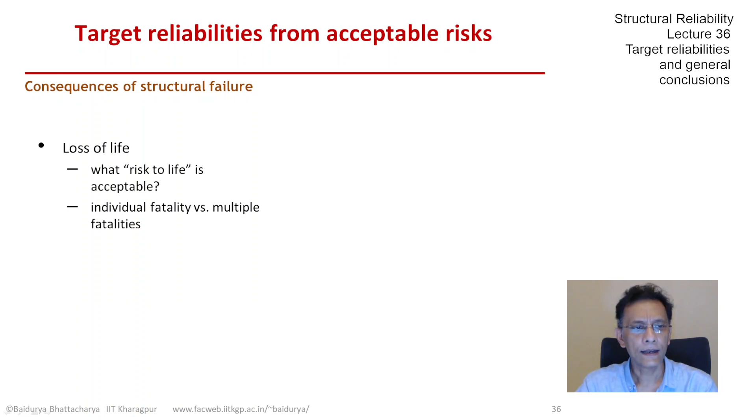Then there would also be the question of the context of death. Was there a choice on the part of the individuals? By which I mean, was the person a member of the public, or was the person a professional in charge of, say, maintaining the building, or a construction worker, and so on.

The other consequences obviously would be economic loss, and then what to include in that would be an important question, and obviously one uncomfortable question that has many implications, including moral and philosophical ones, is: is there a monetary value of human life, and if so, how to put that?

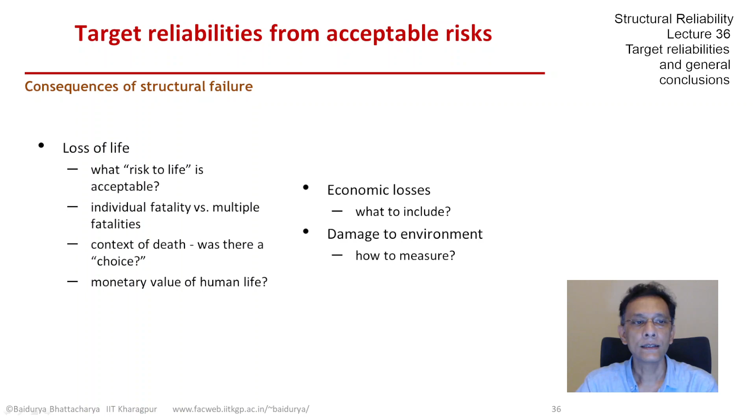And we also have been talking about environmental damage, and if we include that as a consequence, how to measure that. And this is all in the context of acceptable risk that we have been discussing in the hope of setting target reliabilities. So let's take a look at acceptable risks to life.

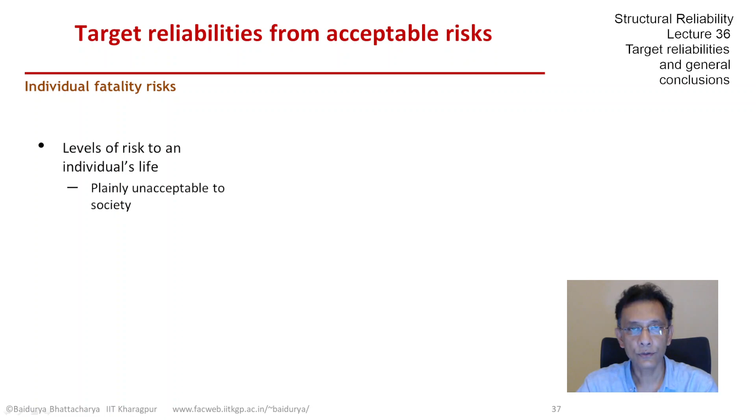Let's get some idea of individual fatality risks, some numbers, but before that, the levels of risk to an individual life from society's point of view could be at a level that is plainly unacceptable. It could be so high. There are other levels of risk to an individual's life which we may not be very happy about, but we grudgingly accept. It's kind of intermediate. We are ambivalent towards that.

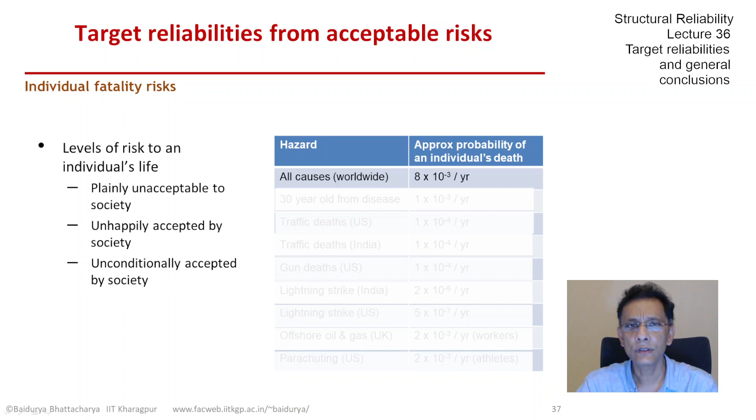And then there are, on the other end of the spectrum, those risks that are unconditionally accepted by society. We really don't worry about those. So let's take a look at some activities or some hazards and what are the approximate individual life risks. So a rough estimate of death of an individual from all possible causes worldwide is about 8 in 1,000 per year. So that's a pretty stable estimate across countries.

Now, if we look at death of a 30-year-old individual, otherwise healthy, from disease, that comes to about 10^-3 per year, which would, without a doubt, be plainly unacceptable to society. So if we have to put an acceptable risk, we would need to go well below this.

Then there are other activities which people undertake because of benefits that come from them, but the risks are definitely more than what we would like, an example being traffic-related deaths, about 1 in 10,000 per year, and that is what we see in the US, that's what we see in India, and we also see a very similar rate of gun deaths in the US. Now, obviously, these are not something that society is happy about. There are discussions about how to reduce these.

So this level of 10^-4 per year per individual would be something that is on the borderline, or something that is in the gray area between clearly unacceptable and clearly acceptable. Now, what would be unconditionally accepted by society? Something like death from lightning strike, and that is of the order of 2 in a million per year in India, and almost one order less in the US. So that's roughly about 5 × 10⁻⁷ per year.

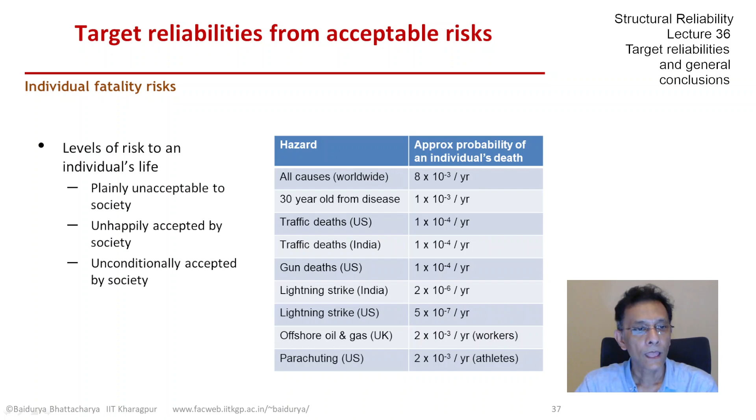These are undertaken in some sense voluntarily, so there is not so much outrage at this level of fatality in these last two mentioned activities compared to the death from disease that you see at the top. So these give an idea about the different ways that society reacts, and would also give an indication of what might be an engineering level of acceptable risk were we to set the target reliability for a structure.

As we saw and as we decided, that 10⁻³ per year for an individual is clearly unacceptable. And we can see something like this right now in the middle of a pandemic worldwide, and clearly the levels of fatality that we are seeing are not acceptable, and that's why so many restrictions are in place, and there is so much concern going on.

Now, the next level, 10⁻⁴ per year, is something people are concerned about. People are, if they can be encouraged, willing to take this up and reduce these risks. So this would be something that, as I said, is on the borderline of acceptability.

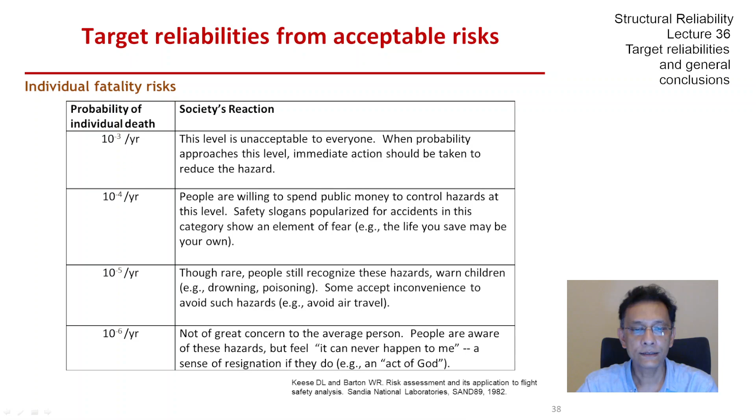And then lastly, this rate of 10⁻⁶ per year for an individual seems to be something people are willing to accept and not worry about, and sometimes referred to as an act of God, and it can never happen to me, that sort of feeling. So with all of these, we now see some criteria actually set by some authorities around the world.

So I have a survey of 3 countries, the HSE from the UK. So for a worker, the maximum acceptable risk is 10⁻³ per year for death. For the public, it is 10⁻⁴. So that's on the higher end of the spectrum that we're talking about. And negligible risk is 1 in a million. That seems to come again and again.

From the Netherlands, we see a different order of magnitude for existing situations which people are more comfortable with. It's 1 in 10⁵, and for new situations, the tolerable risk is of the order of 1 in a million. So that kind of ties in with the negligible risk from the UK.

In Australia, we see some of these numbers, and the acceptable rate for schools and hospitals is of the same order as a lightning strike in the US. So they want it to be as low as that. For residences, they're of the order of 10⁻⁶, so very low, which is considered negligible in the UK. And for industrial, sporting and commercial activities, they are another order of magnitude higher in terms of acceptable risk.

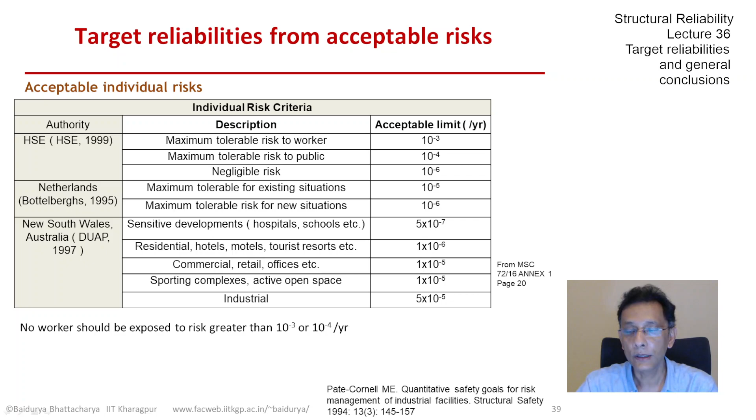We see something from Pate-Cornell, just to summarize the general trend from around the world. She came up with certain recommendations that the risk to a worker should not be greater than 10⁻³ or 10⁻⁴ per year. For a member of the public, those would be 2 orders of magnitude less, 10⁻⁵ to 10⁻⁶ per year.

And the de minimis that we have been talking about, that's something that is of no legal concern, of just no consequence really. That could be as low as 10⁻⁶ for a worker, and so that would be the ideal case. And for a member of the public, 10⁻⁷ or even 10⁻⁸ per year.

So with these, we can try to see how buildings come into the picture, building failures or structural failures, and how we could then look at multiple deaths. So these are all for one individual. Now, if there are multiple fatalities possible, how we would handle that is also a very relevant question for building or other structural failures.

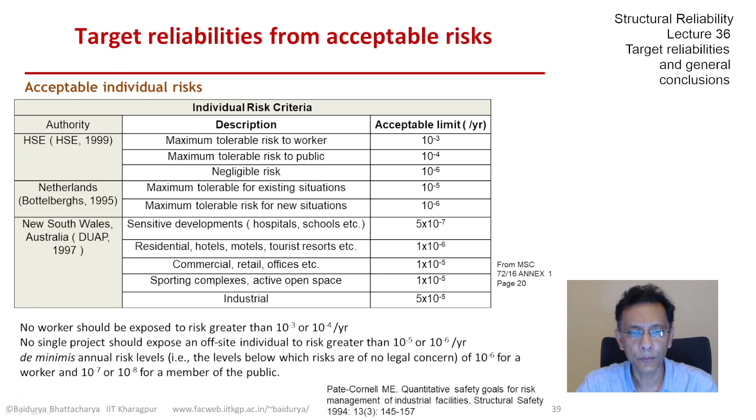Let us also look at this concept of fatal accident rates, which is a nice way of bringing in limited exposure. So what if an individual is exposed for a very limited amount of time, and what would be the measure of acceptable death from such a limited exposure? That is given by the FAR, which is defined as the number of fatalities per 100 million hours of exposure, which is the same as 1,000 people working full-time for 40 years.

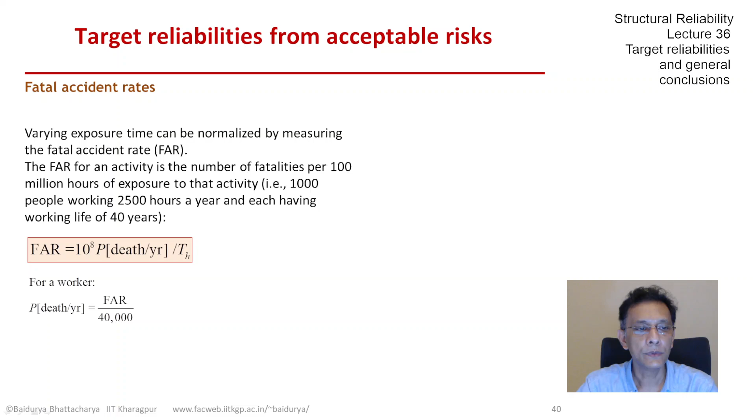And that is given by this formula. So for any activity, if T_H, which is the exposure time in hours, is less than 2,500 hours per year. So that would be a nice way of putting all these different exposures and risks on the same metric. And for a worker, one could get back the annual fatality risk as the FAR divided by 40,000.

Let's take a look at some of these numbers from two countries. One is India, which I have computed over the last few years. So it's interesting to see that rail travel is the safest when exposure is taken into account compared to all the other modes of travel. Walking is also a bit dangerous, and that's partly because a lot of these walking fatalities occur as traffic-related accidents.

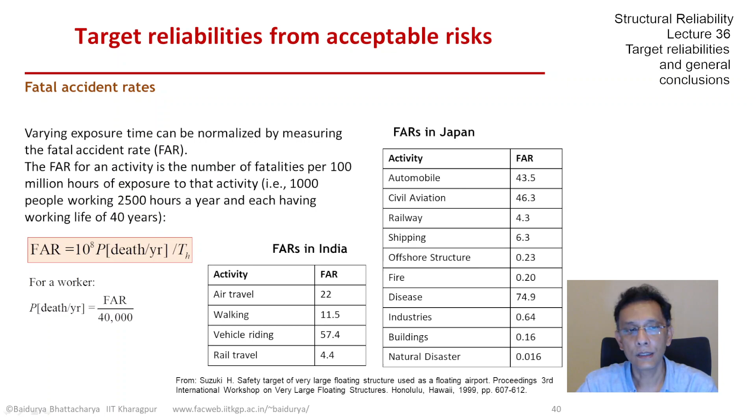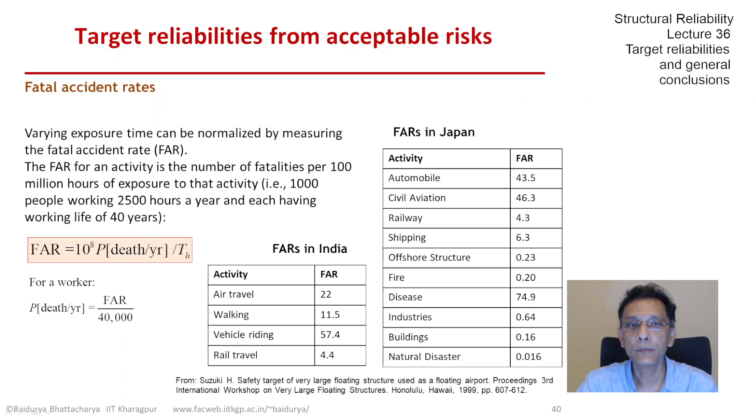In Japan, in comparison, we see some different sorts of numbers, and we see that in terms of air travel, car travel and rail travel, the numbers between India and Japan are of the same range, especially in terms of rail travel. That number for buildings is actually very low, which seems to be a very good thing in terms of structural failures. But now we are going to look at what happens for buildings, and especially when multiple fatalities are involved.